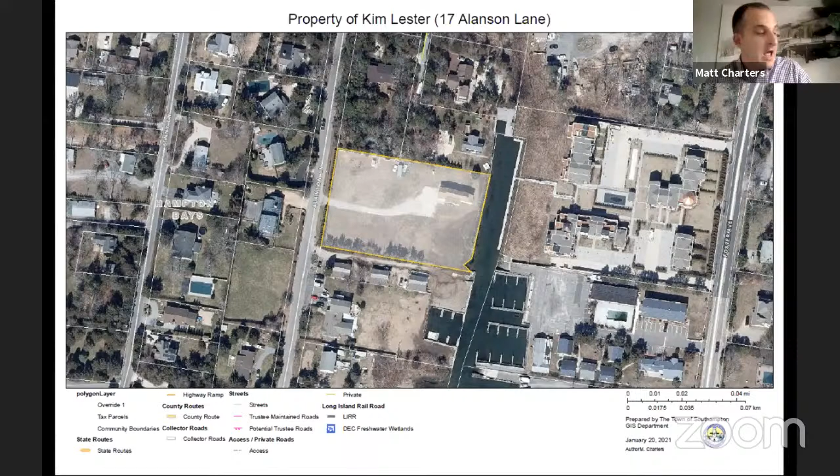Let's see if I can get this - everybody see that? Okay, so this is a work session to discuss a site plan and special exception application for dry off-season boat storage on this parcel at 17 Alanson Lane. It's about 55,000 square feet, contains a pre-existing single-family residence, it's in the RWB, New York State Archaeological Sensitive Area, in proximity to town regulated wetlands. I have a survey here that shows they want to do off-season boat storage in this area in the front. One issue we see is that there's already one use on the property in RWB - it's one use per 40,000 square feet, so it would need a variance.

And I'll turn it over to Susanna. Hi, can everyone hear me okay? Fine, yes. Okay, good. So the property is owned by Kim Lester.

He inherited the property from his grandfather in 1969. And at that time, the taxes were about $100 on the property. Now they're over $11,000 per year. So they're seeking to supplement the income for this property by storing boats in the off season.

We are here today to get some feedback and a general impression from the board, because in order to enact this plan, they would have to get a zoning variance, as Matt mentioned, and then come back to you for site plan approval and a special exception use, and wetlands review as well. So before going down that long road, we wanted to get some feedback.

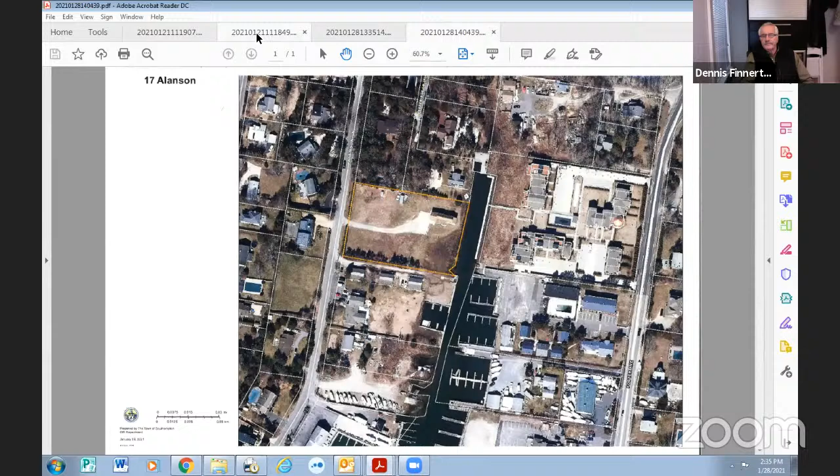One thing we want to make sure is we get input from either the fire district or the fire marshal. If you go back to the sketch, you want to make sure that you can get - they may have specific requirements of spacing of the boats to get emergency equipment in, you know, if there's an incident. So I think it would be good to get that input early.

Okay, so is this one level, Susanna? Yes, these would just be parked on trailers in the yard, just on the ground. And what is your route to get them to this dug canal? You're going to have to go through the wetlands? Oh no, there wouldn't be water access. This would just be for storage, just straight storage. Essentially a boatyard.

Matt was sent along chapter 330 of zoning, 330-126, which covers boatyard. What it says in D of 130, of 330-126: in addition, all the requirements listed for the marina shall apply to a boatyard, and they're extensive. Have you gone over those? I have not specifically.

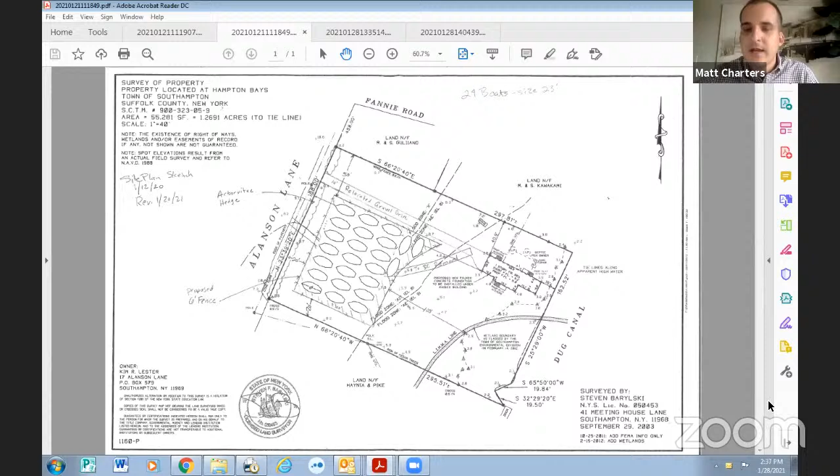Okay, well, there are 6 requirements - a marina for private profit, which applies to a boatyard. Matt, are you around? Are you there? Yeah, I can pull it up. Susanna, if you let me just exit so you can share the screen again. Okay, and I'll just pull it up so everyone's familiar with what the requirements are.

Yeah, so this would be a boatyard. All minor and major repairs to recreational boats and commercial fishing may be provided in such a repair service, not deemed incompatible with the use of adjoining properties. Outdoor storage of boats may be permitted - it just gives some, commercial fishing, dockage, warehouse, outdoor storage uses may be permitted. And then everything for marina would also apply to boatyard, I think, as you do it. It is a special exception, so these requirements would have to be met as part of the site plan. That's pretty much it.

So the major issue is the 2 uses on the property. I don't think we would be proposing to do any boat repair at the site. Yeah, and that's something the board could condition, on a case by case thing, that's what they say. This is going to only be for dry storage, boats on trailers, no repair, no washing, no detailing. We wouldn't have a fueling facility, we wouldn't have water access. This would be purely storage. They don't have interest in running a business beyond just renting the space.

Is the house rented? I believe so, yes. And where is the access? Would that be alongside the boat storage? There is - they've just moved the driveway over, actually. There is a gravel driveway that goes straight in from the road to the house. Okay, I can see that now, thank you. And that's where they would bring in the boats as well. There would be a gate in the fenced storage area to come in that way.

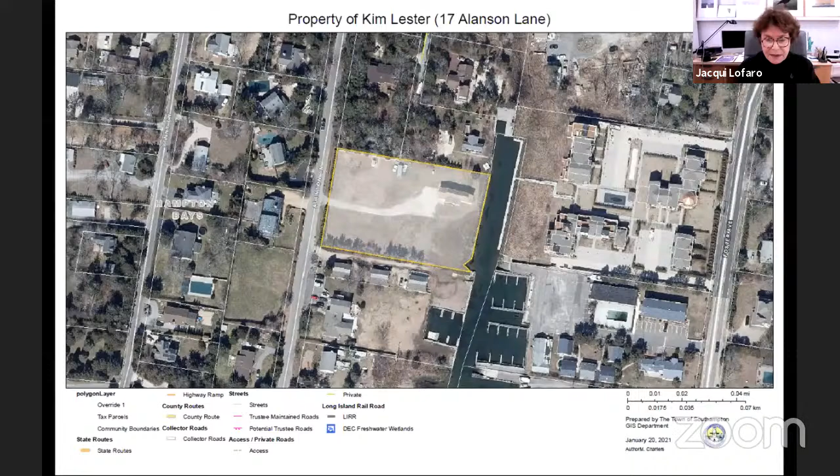And the application says that there's a pool. Can you just point out where that swimming pool is? Jacqui, I don't think there's a pool. There is no pool, no.

The house is going to be a two-story frame house with garage, right? Am I looking at the right thing? I don't think there's a garage. Oh, okay. There's an attached garage, I believe, or there was at one point to the house. But we're not proposing to do any other construction.

This is the unique situation where the house is actually the pre-existing non-conforming use and the boatyard would be a permitted use by special exception in the zone. So the major issue I can see here is whether the house can remain with this other use. But that's up for the ZBA to determine.

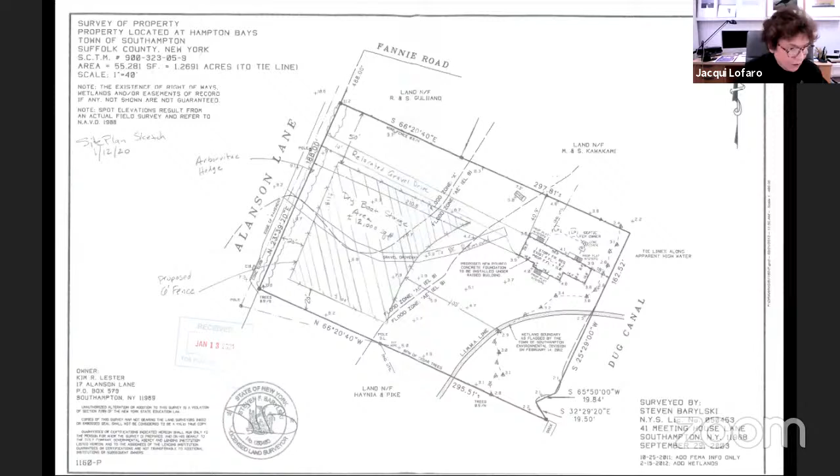I think you have some direction, Susanna, from us, unless you have any other questions. Is the board comfortable with seeing this if Susanna proceeds to the ZBA? I think there's going to be some neighborhood pushback. As a board member, I don't have any particular heartburn about it. I think it's a reasonable use of property based upon, as was explained, the current tax situation and so forth. But I agree with Jacqui that you're probably going to get some pushback from the neighbors.

Is it RWB though? It's RWB. So actually, like I said, the house is RW. What could happen is the house could no longer be there, and then a boatyard, they could submit an application, a pre-submission for the special exception for a boatyard. The town creates these zones specifically to accommodate these types of uses. I remember years ago when the area in Eastport where Trumpets was coming in, before Trumpets was built, wanted to change to a residential zone, and the town said no. They want to keep it as RWB; it's a valuable zoning designation.

Right, even though this is on a dug canal, it's not on a natural water body, it's RWB. There are many RWB parcels that are not even fronting on water.

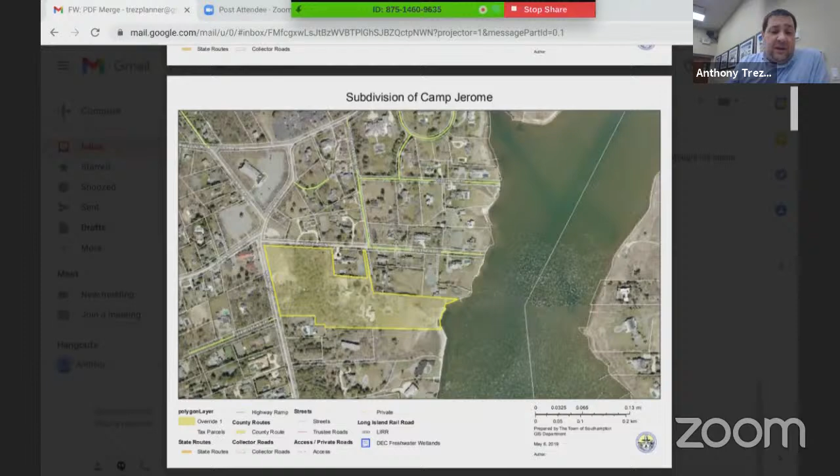I'll try again here. So anyway, this is a subdivision off of Main Street in Quogue. This is the water quality improvement high priority area, R40 zoning district. There are multiple existing structures on this property, including a main house and 2 cottages, as well as a number of accessory structures. The application, and this is actually a yield map, showing a total of 8 lots. Their preferred plan was a 4-lot reduced density plan, with 2 lots up here, 1 lot down here, and then the 4th lot containing all of the existing structures.

The application was previously deemed incomplete. The planning board raised the question about having 3 residences located on 1 lot. So this went to the Zoning Board of Appeals, and in a recent decision they approved the layout of the subdivision that would allow for the 3 residences and all the other structures to be located on this property, and then 3 vacant, new lots up here.

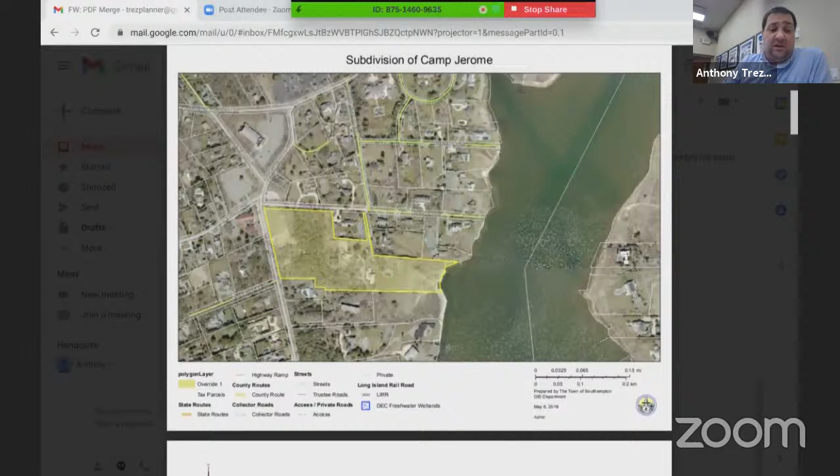The last time we discussed this, they were still pending with the ZBA. We discussed waiting for the ZBA decision. We were waiting for the yield map, which the applicant submitted. We did talk about a cluster plan, but the planning board waived that requirement for this property. So at this point, it looks like we have everything we need to deem this application complete, as a pre-application, and to schedule the hearing for February 25th.

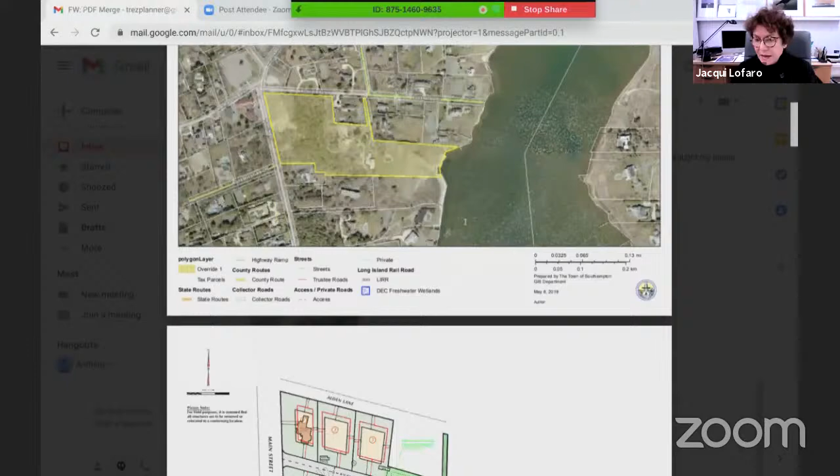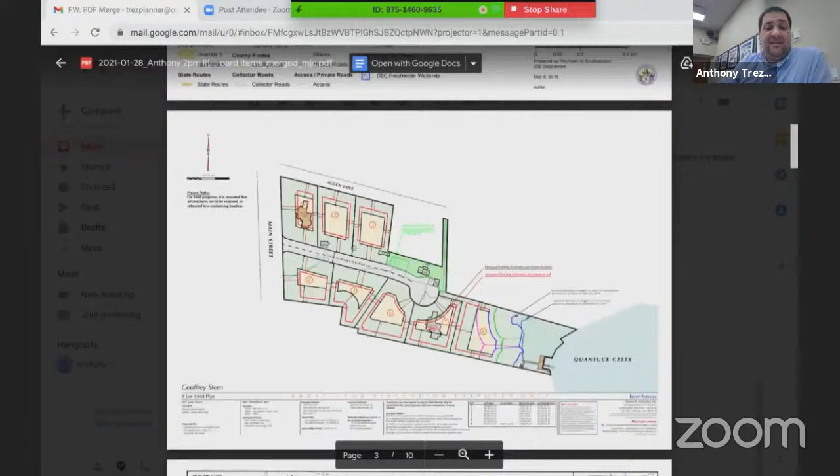Can you tell us the rationale the ZBA provided to allow for 3 residences on 1 lot? Well, I think it was ultimately that the applicant was able to demonstrate that the overall subdivision density - these 3 new lots and the 3 existing residences here - ultimately would not result in any additional density beyond what the yield would authorize. So if they were entitled to 8 single-family residences, the result of the subdivision is still only 6. That's as best as I could ascertain from the ZBA decision.

Anthony, just a clarification - in the packet we're talking about a proposed 3-lot subdivision, but I'm hearing there's a 4th lot, and I apologize, Gloria. It was an error on my part on the description. There were multiple plans submitted previously, but the preferred plan was the 4-lot plan, so the description should have been 4. That's correct. I thought maybe because those houses are there you don't count that lot. No, it's definitely a mistake, and I'll fix it, and the final agenda will be fixed.

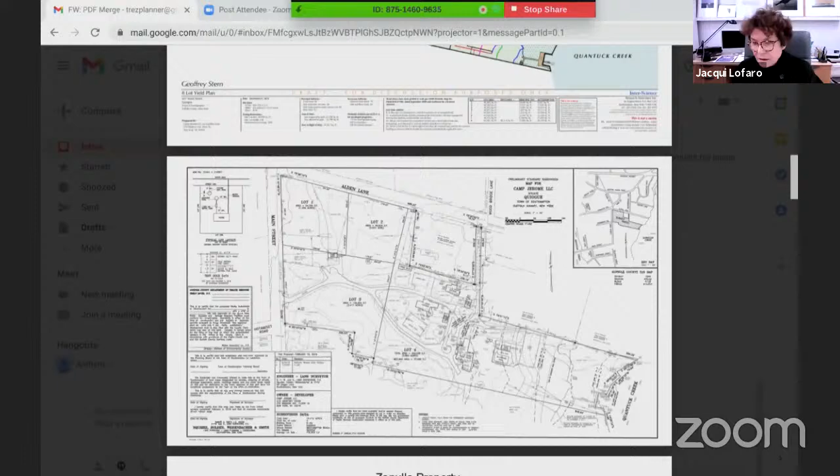So it's lot 4 that has the 3 houses? Yes. And it has sufficient setback from the Quantuck Creek? Well, they're all existing, so I believe the wetland setbacks are here. I think the swimming pool improvements don't meet the setbacks, but they're pre-existing. Okay, so it's complete and we schedule a hearing for February 25th. That's correct.

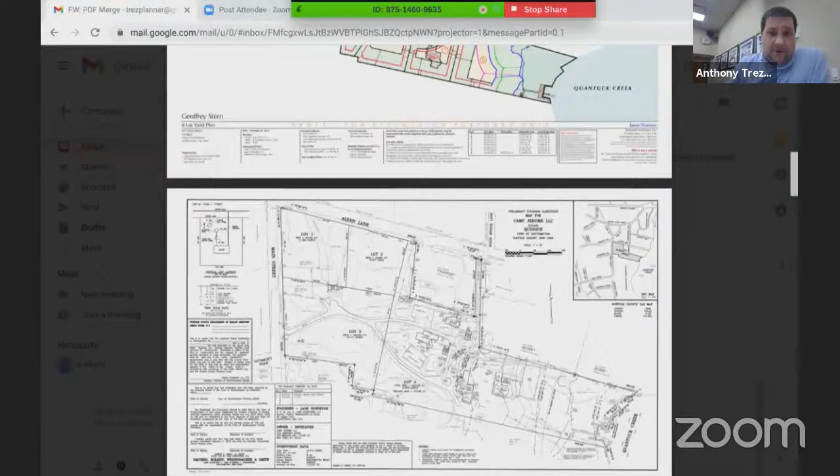The planning board should be aware that this is a family-owned property. It's always been Camp Jerome. There are 3 members in the family, and they took ownership of the property. They came to us and asked for ideas on how to deal with it. As we got into the property, they expressed interest in keeping the main lot themselves. There are 3 houses: a big house, a 1.5-story cottage, and a 1-story cottage, and the 3 families go there in the summer. If you visited this summer, you'd find kids running around playing on the basketball court and tennis court, and there's a boat slip at the waterfront. It's very pleasant.

This used to be an artist family property. Camp Jerome is named after Jerome Stern. A lot of the art was moved off, especially near the road, but much of it is still there, and the family wants to keep as much intact as possible. There also was a little pony school up front, but that's kind of petered out with COVID-19, so I haven't seen the ponies in a year.

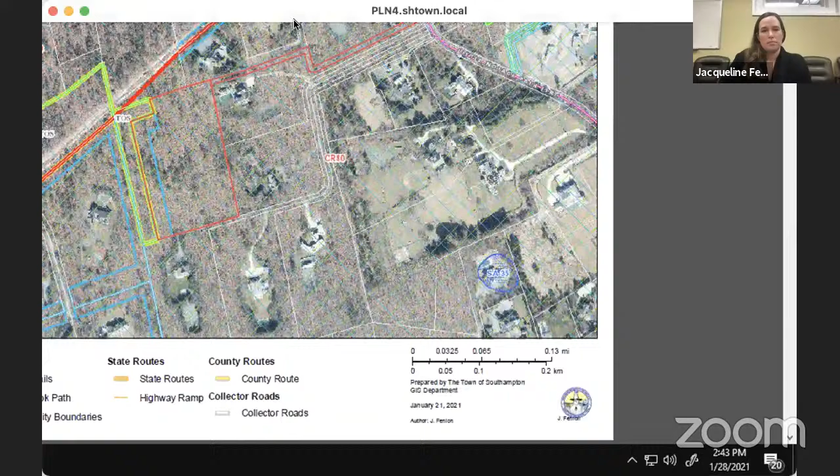So this is the overall area, on Little Noyack Path. You can see there's adjacent open space here and to the north. One reason the applicant would like to discuss this today is for completeness, but they also wanted to know whether the planning board would consider a cluster plan. I thought you would at least want to review a cluster plan, given there's a small strip of open space and the parcel is oversized. They are seeking 2 lots.

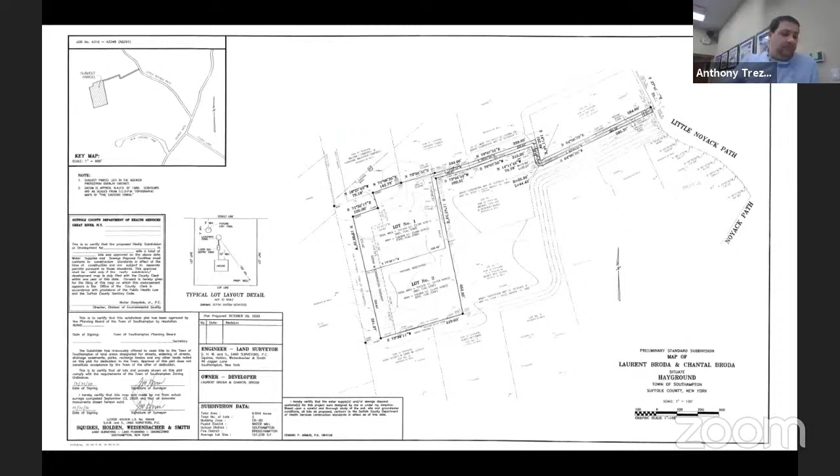On this lot there is a scenic conservation easement already established, and they're asking to serve it via the existing 25-foot flag strip, which would give each lot 12.5 feet of frontage on Little Noyack Path. I was playing phone tag with the applicant's representative, but I discussed some items missing from the subdivision map. We agreed he would give me information on the access strip, which you might notice is actually a separate described property from this one. I wanted to know how this was established, and also to get the intent and understand who imposed the scenic conservation easement here.

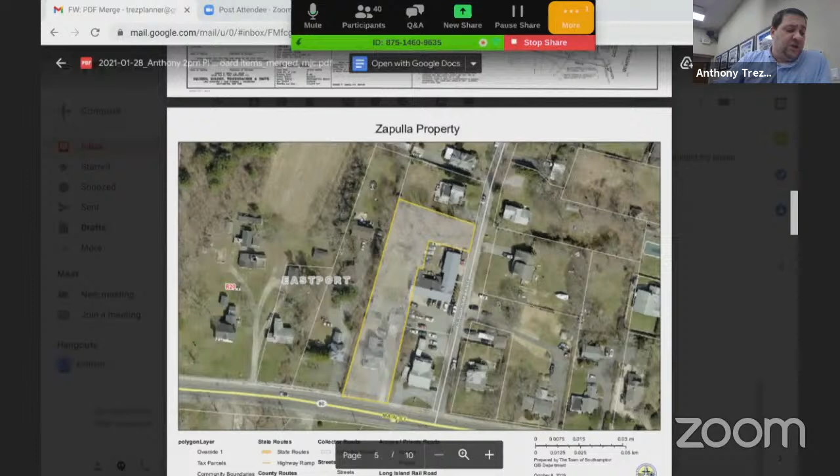Anthony, the Zapulla property extension, one year? This is a 2-lot subdivision in Eastport. It has an existing single residence in the front. They're going to be doing an affordable housing lot in the back, so they had to go to the Zoning Board of Appeals on that. The Zoning Board just had their first hearing last week on it. I attended that hearing, so they're in the process. We're a little late with the extension, but the extension would bring the pre-app report until January 9th, 2022, and this is just the first normal extension.

Okay, motion for the extension, motion by Dennis, second by Zuccarelli, all in favor. Aye. Abstention, 6 in favor.

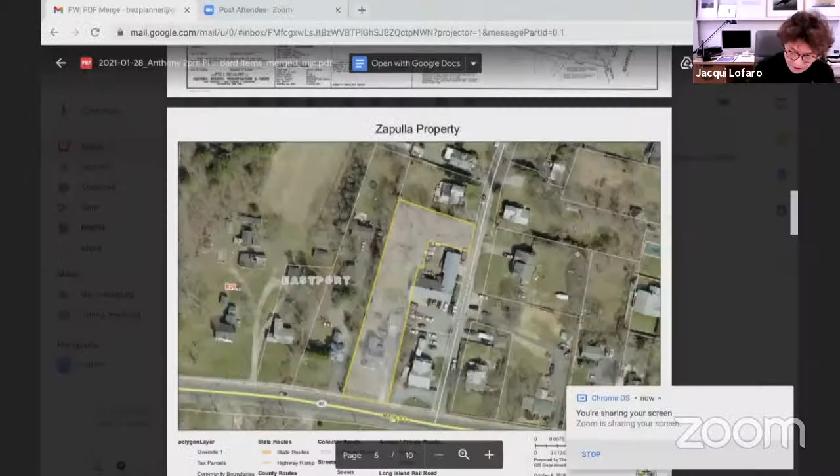The Fisher organization is off the agenda, number 7. Yeah, that's off. And Eric Donato, number 8, is another extension. Yep, so let me just get to that. Okay.

This is a Hampton Bays property, on Bay Avenue West in Hampton Bays. This is a lot in the R20 zoning district, has an existing single-family residence on the front here. There is a right-of-way that traverses the property, and they're looking to do a second lot in the back. They're also before the Zoning Board of Appeals for this application. This would bring the pre-app report, this being just the first extension, until July 19th of 2021. It's a little late, this one. I happened to notice it in the system, so I got in touch with the applicant, but it would bring it until July 19th, 2021.

Great, motion for the extension, motion by Gloria, second by Dennis, all in favor. Aye. Opposed, abstention, 6 in favor, 1 absent.

Jackie, can I just interrupt real quick for one second? Sure. Just to remind you, number 10 is off the agenda, Oakland Farms. Got it, right? And I just wanted to ask if I could quickly walk on, it'll take 2 minutes.

At the last meeting, we did a covenant amendment for 4 Blue Jay Way, Wildlife Associates, Section 1, Lot 54. It was a covenant amendment to allow the clearing to go from 35% under the covenants to 50% under the code. Robin, yeah, I would go to recuse myself immediately from this, so I'm going to turn off my video. Okay, mute myself. Okay, but we didn't have 5 votes last time, we only had 4, and the covenant amendment requires majority plus 1.

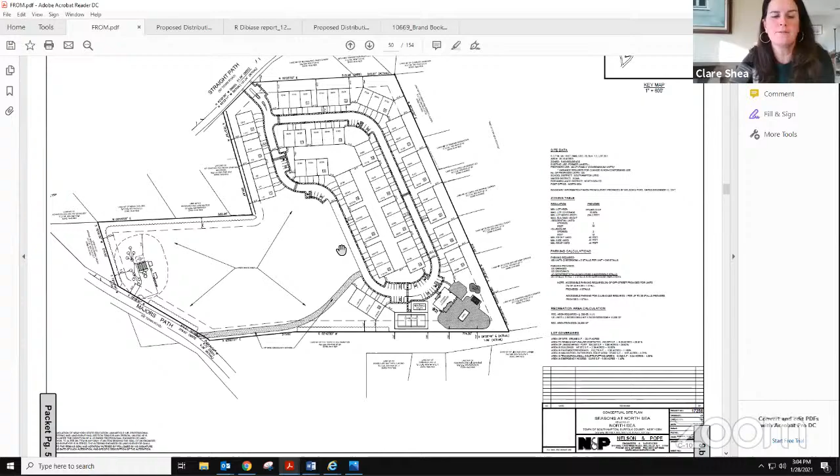And here's the plan that's proposed. They have changed this, so this was supposed to be an emergency access, but I believe that is going to be their primary access now onto Major's Path. There's the architecture, the application. It's sideways, I know, I'm gonna just get to the point and flip it back.

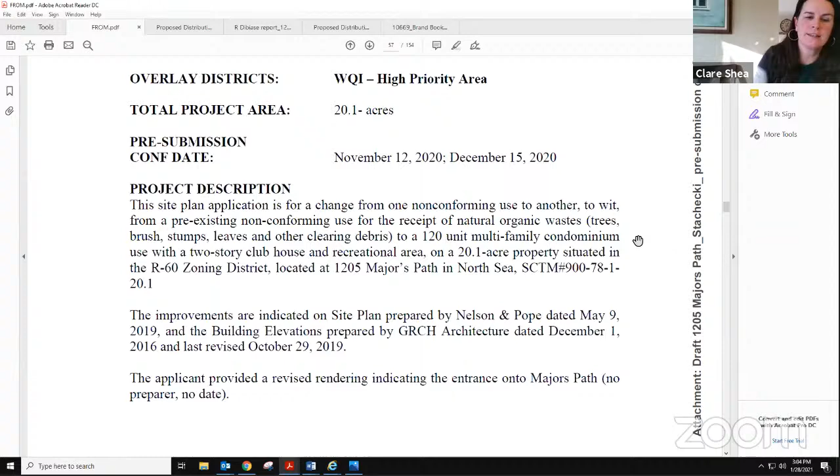This site plan application is for change of one non-conforming use to another, from an existing non-conforming use for the receipt of natural organic waste, trees, brush, stumps, leaves, and other clearing debris, to a 120-unit multifamily condominium with a 2-story clubhouse and recreation area on a 20.1 acre property situated in the R60 zoning district at 1205 Majors Path in North Sea. This describes the plans, and the applicant provided a revised rendering indicating the entrance onto Majors Path.

There's the references to the pre-submission conference dates, and the attachment is the public comments. Prior to site plan, SEQRA needs to be completed, a ZBA decision granting variance to change from one non-conforming use to another, of course a full application. So the project is a Type 1 action. Planning board as the lead agency will be required to make a SEQRA determination prior to deeming the site plan application complete.

I left this as is, to add additional information here, but maybe after we can go through the part 2, you could identify some of the issues you'd want to spell out here. I'm not quite sure if you want me to add anything right now. Well, let's go through the report, Clare.

And then the uses - attached is a copy of the CO issued by the Town of Southampton Building Department for the pre-existing non-conforming use for the receipt of natural organic wastes. This use was the subject of a ZBA matter, and the ZBA upheld the CO on June 18th, 2020. I also have that attached. The applicant stated that composting operates on site as an existing use. This is not supported by the ZBA decision - the ZBA is silent on processing. The planning board has requested a copy of any DEC permits issued for composting. Nothing has been received to date.

On the record, the applicant and the public have noted the site was a former dump site, the old North Sea landfill. Some of the history of the dump, which has been determined to be abandoned, is outlined in the ZBA June 18th, 2020 decision. No information has been submitted to date about the nature of the supposed contamination and the limits of said dump. Any residential development shall have an affordable housing component which complies with state and town requirements. No information has been submitted as to the as-of-right development under R60 zoning - cluster and yield and cluster plans with affordable components should be provided. I'll add that - should be provided, yeah.

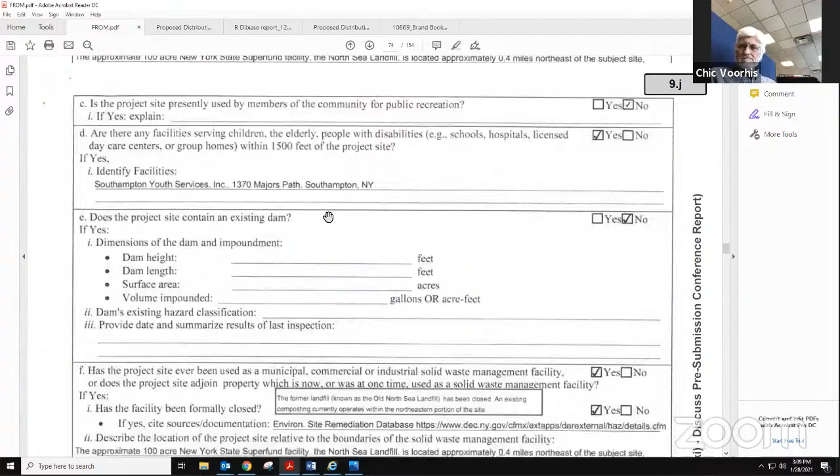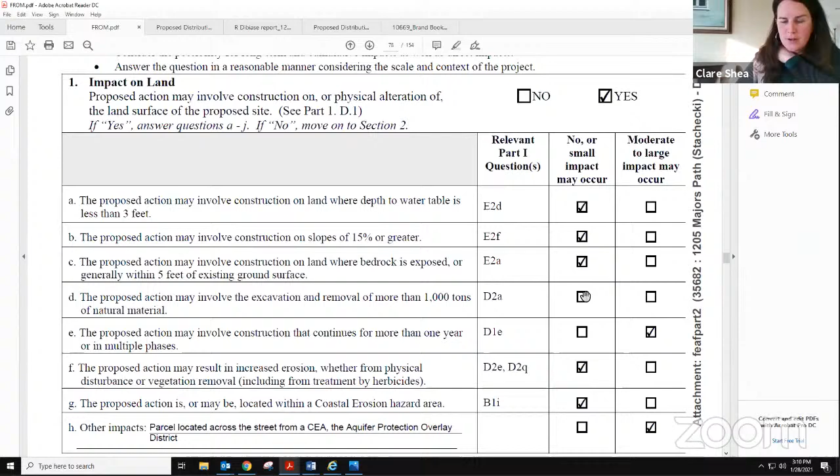Sorry, that's backwards. So this is the applicant's part 1 that was submitted, and this is part 2. As I just checked it, I didn't put any details in this, but this impact on lands is small to moderate. The action is more than 1 year. The parcel is also located across from a CEA. The Aquifer Protection Overlay District border is Major's Path, just so you know.

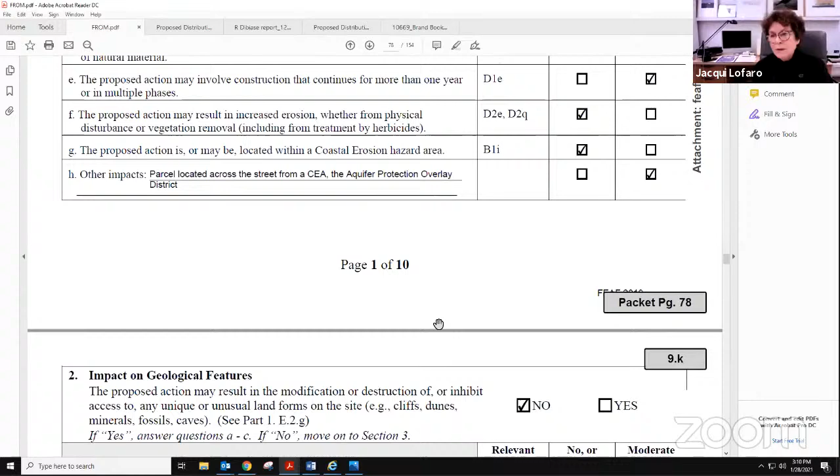Do we have to include anything in here about a prior designation as a Superfund site? Oh, I think there's definitely some designation coming up with that. So where would you put that, Clare? Yeah, I can put that in impact on land. Now its designation, not that it's a Superfund site, it's a potentially contaminated site, right, that we don't have the information for. But are you saying the Superfund site of the dump across the street? No, I'm talking about this parcel. Do you want me to say anything about the dump across the street too, or no?

Well, on this particular breakdown, I think we need to focus on the parcel itself. Is there any evidence that the parcel across the street is having any effect on this parcel? That's a good question, and this document is for this question. So I would encourage adding the parcel across the street and the issues, until we know for sure there is no impact from that parcel to this one. We do know that drinking wells in the entire area were contaminated by the dump, which is why there's county water there now.

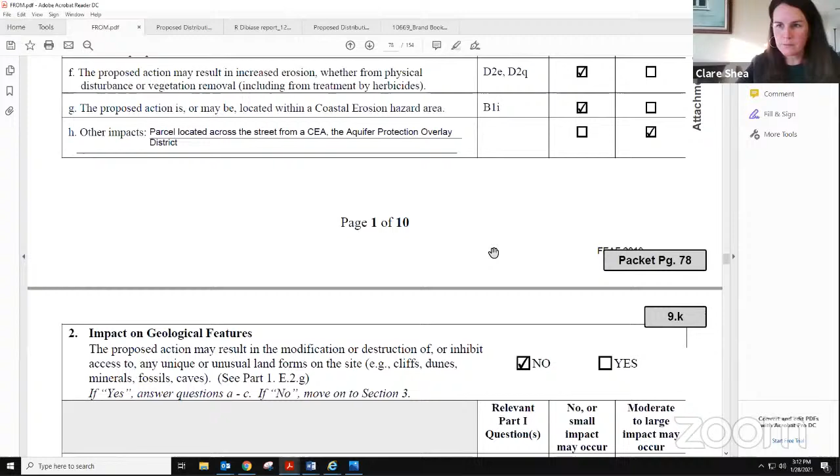So you're going to add that to the language in H, Clare? Does that alter any of your small to moderate to large impacts? Yeah, that's what makes this a large impact. I agree, and we'll put some language to that effect in there. So we're going to note the parcel across the street and the issues. Thank you, yeah, there may be a place for that later too, so there might be some crossover here, but we'll come to that. Duplication is okay, probably under groundwater. So the impact on geologic features, no. Surface waters.

I'm going to give some thought to this. I'm not quite sure if the board has any thoughts, so I'm just going to guess. There were a couple of comments related to the harbor, so I'm going to think about this section if you have any comments for that.

I know the pollution plume from the dump had been determined to be heading toward North Sea Harbor, down gradient. In fact, the monitoring wells for that facility are all placed in the northwestern proximity, so unless the hydrology has changed significantly, one has to assume that this property is in that same flow region. Yeah, right. So I'm going to click this and put some more language in here.

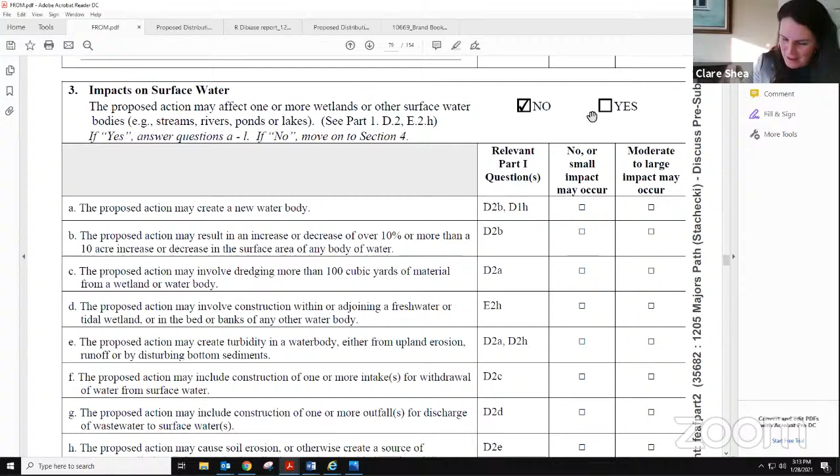Oh, or no, I can't click it. Sorry, it's not an active thing. I'm going to check it and fix that. Here's a pen for you, Clare. I know, I'll get to it, I promise.

And also the remediation of this site when it was kept in debris. I believe we have no further determination about that remediation. We asked for it, we asked for DEC updates. Right, so I think we need to include that here.

Clare, is there any place where the idea that this is such an intense use, the ability for the electric grid to support that intense use, where might that be? Energy coming up. Yeah, thank you, definitely, that's a good point.

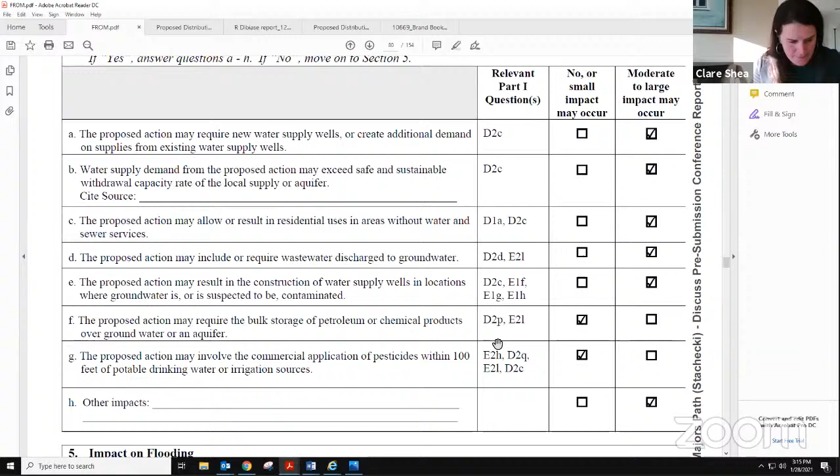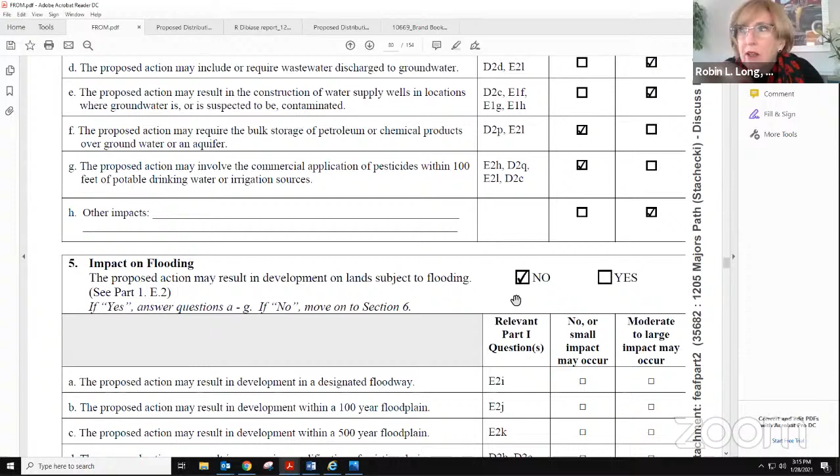There were some comments on services. Okay, so I'm going to put the information on groundwater related to the landfill on site. Impact on anything, excuse me. So it's the landfill on site, and also aren't we going to look into whether the landfill across the street has any movement towards the water sources from there? I agree, we should have some language to that effect in there. Thank you.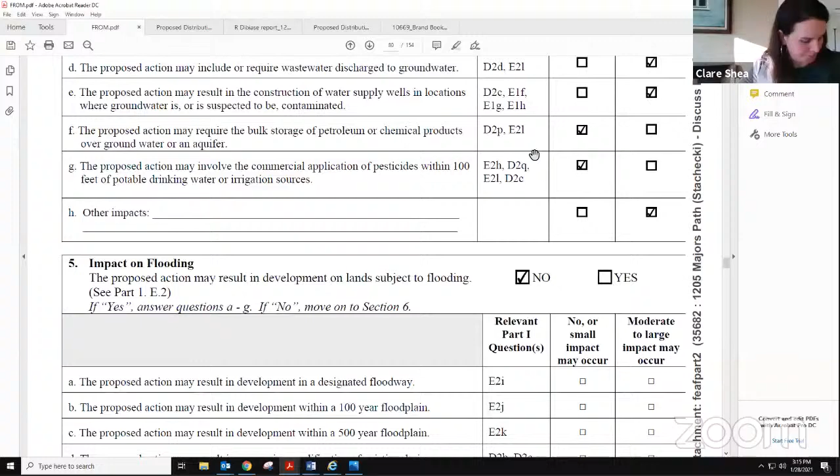Okay. And then impact on flooding — I don't have anything identified on that issue. Impacts on air, I'd say small to moderate. I start to think that air quality might be an issue.

Traffic, traffic, yeah, so that's up to you. What do you think this is — small to moderate, or large? Well, again, because of the intense amount of property that's going to be overused, it's got to be large. You know, instead of 6 houses with maybe a dozen cars going out, now you have 120 condos with a minimum of 240 cars. That's an exponential increase.

I know there are Suffolk County health reports where people think the air in the east end of Long Island is so pure. In fact, it isn't — it's horrible, because of traffic, with the combustible engines on cars. Not enough of us have electric cars.

Okay, so are we changing that to significant, or what is that? I'm changing that to be large. Yeah, and I'll put some language into that. Again, we'll have an opportunity next week, and I'll send it to you ahead of time. So give some thought to it.

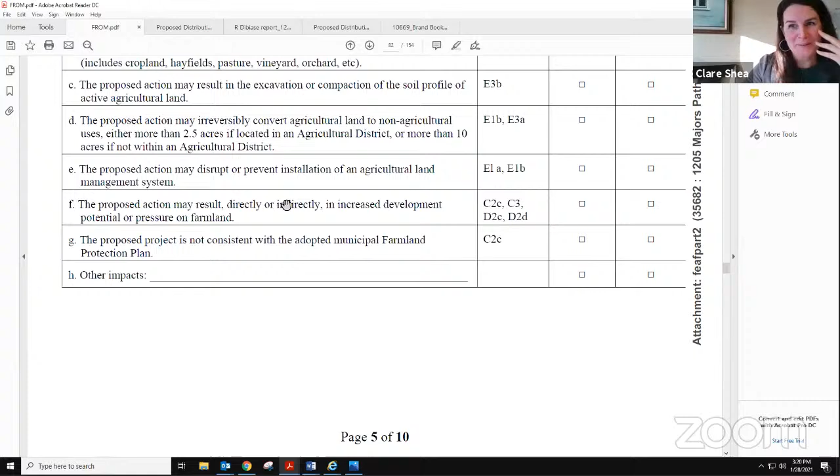Impact on agricultural—I didn't identify anything. This is supposed to be a tree farm, so I don't know, but it's not an ag district.

Impact on historic aesthetic resources. I think there's a large impact, not the character of the zoning. Which categories do you have large? This is aesthetics, so I would check the last one in terms of character, and that would go back down to community character. And that falls within this aesthetic category? Yes. Okay.

This does not appear to be in an archaeological or historic site, so I did not check this. It's a historic dump from the 1950s. I bet there's interesting things in there, that's for sure. I don't know, is that one of the thresholds? Now I'm being a little silly.

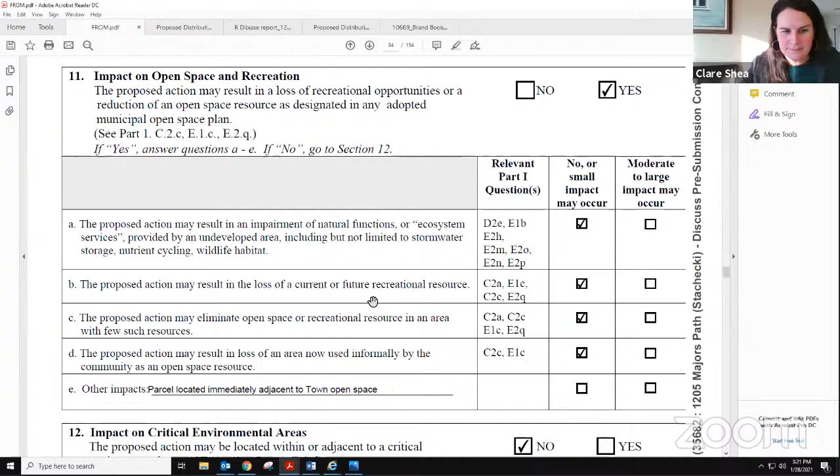Gotcha. So the next section is open space. It is immediately adjacent to open space to the, I guess, northeast, maybe. I don't know if you want to just check this to be small to moderate. Small to moderate, I think, yeah.

So it is not in a critical environmental area that I've identified to date. As I said, the aquifer protection is on the other side of the road, so this is the border.

Impact on transportation—this is a large one. I'll put some language to that effect in here with the numbers and things.

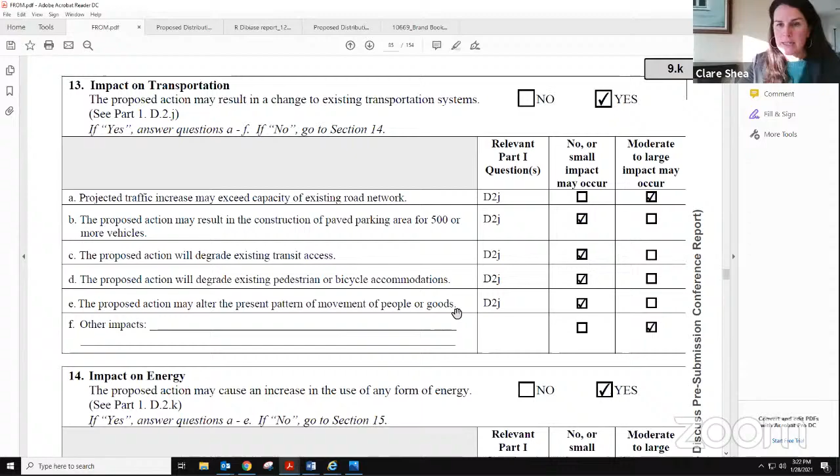Very much. And here is your impact on energy. I think this is a valid one. I've checked moderate to large. I did a quick calculation of this, and it's well over 100,000 square feet of building area.

And then noise, odor, and light. This one I did check, obviously for construction purposes. Hopefully no more odors with this use. This is a potential—obviously we have a very strong town code, so this could be small to moderate if it's controlled through the site plan. But I think it's the number of lighting in one area that it would result even if the density—yeah, so that's why I've done that. If you want me to change it, I can.

And then impacts on human health. Is the site of the proposed action currently undergoing remediation? Maybe not currently, but should—we just don't have that information yet. And so I've checked a couple with the solid waste modification facility, unearthing solid and hazardous waste. We just don't have a lot of this information yet, so I'll try to answer these questions. I've just said former dump, obviously, but I'll put some more language in there related to that.

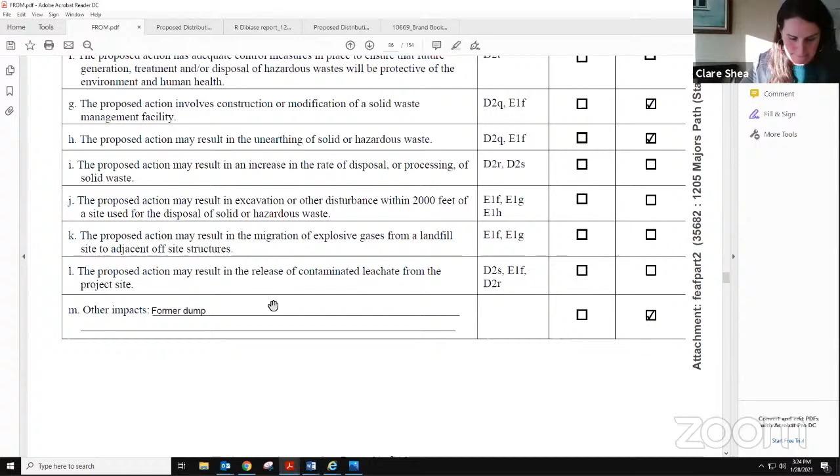Anything you want me to add? Well, you'll just flesh those out, right? Yes, this is going to have a part 3, which is a narrative. Language, yes, we'll go through it. And the consistency with the community plans—yes, large, all of them. And then consistency with community character, correct. Again, a lot of this is that you don't have all the information, this is a concept, and that's what SEQRA helps you get.

Any other questions? No, that looks pretty complete. Thanks for going it over. Do you want the applicant to speak, or does the applicant want to speak with you? Here, Chick, David, would you like to say anything, or have you heard the report?

We've heard it. Hi, everybody, Chick Voorhees of Nelson Pope and Voorhees on behalf of the applicant. We're here to listen. We did get a copy of the draft pre-submission conference report before the meeting, and everything looked to be in order. Certainly identifying the potential impacts is critical to this process, so we're taking notes—it's almost in effect like scoping.

These are the things that are up to the planning board to determine what impacts are potentially significant or small to moderate. I have nothing to add. I think Clare did a great job, and we understand the concerns.

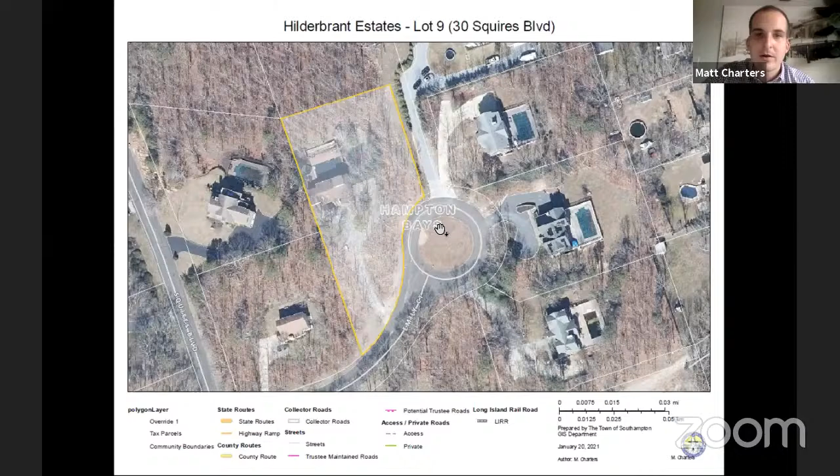Number 11, Matthew, Hilderbrant Estates covenant amendment. This is a covenant amendment to bring the clearing restrictions into conformance with the town code on the property, located at 30 Squires Boulevard in Hampton Bays. They were limited by covenant to 12,000 square feet; the amendment allowed them to go to 50%. We got a survey with this application that shows they're in compliance, and the aerial you're looking at is actually pretty new, from 2020, so it still looks good. Kathleen's reviewed the language and found it acceptable. That's pretty much all I have, so if the board's okay, we can move it.

Okay, any discussion? If not, a motion? Motion on the covenant by Gloria, second by Dennis. All in favor? Okay, six in favor, so we have a super majority, and one absent. Thank you.

Jackie Rothman, Dynasty. Yes, can you please let Daphne Vaughn in, and I believe also the owners of the property, the Rothmans, would be on the Zoom call. Okay, this is a super lengthy report, so you might want to not read every word of it, please, but just go through it. Charles, are you seeing Daphne and the Rothmans? Yes. Okay, thank you.

Okay, so if you'll recall, this is the subdivision. They're seeking a 2-lot subdivision. This is the same property where they were seeking the covenant amendment for no further subdivision of Lot 1, which this is. The other lots in the subdivision go further to the east. This is an 8.05 acre parcel with a yield of 2 lots for the R80 zoning district.

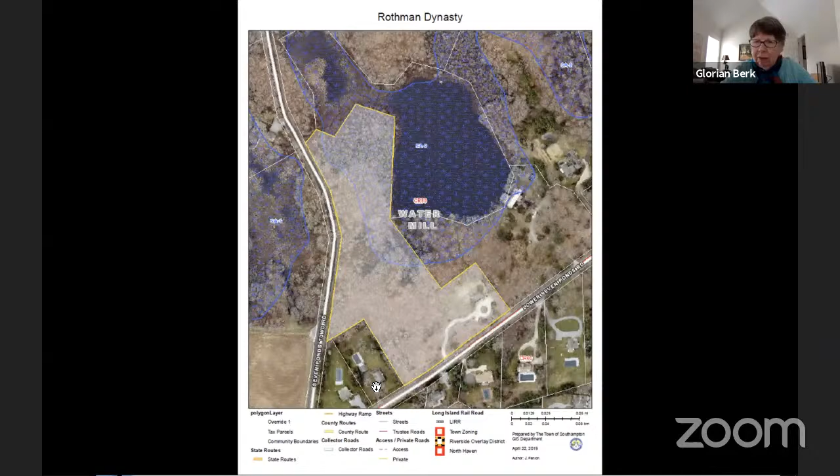It doesn't matter which way they go, they're going to be in a queuing situation, in my opinion. I've seen it much worse here. I haven't ever really been queued back to here before, but that's my personal experience. It's all on Lower Seven. I live probably closest to anyone, and it's all on Lower Seven. Oh, that's my back road to Water Mill. Yeah, I've definitely been queued on this entire road, all the way back to this, what is that road? Head of Pond.

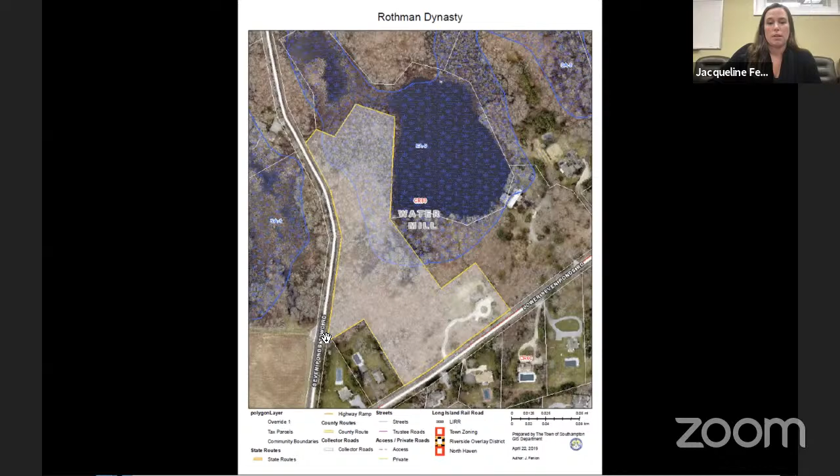So there has to be some discussion with the highway department. Jackie, in the recent comments, I might be interpreting this wrong, but I felt like they were changing their tune. I felt like they were now amenable to one driveway as long as it was built in accordance with their standards, with a bond held for the maintenance of that for an initial year.

Would you like me to read it, just because I know it's probably small on your screens? The only question I have is I'm getting confused because it started with an issue about drainage, then we've been talking about cars and traffic queuing up, and now they're saying... so let me connect this. Is it their attitude because of the drainage, but how is that affecting the cars queuing up? Because Robin, they wanted a driveway to get out of their property. No, because of the queuing up. Yes, so there's a nexus.

The traffic isn't changing because we've changed the drainage. Right, so Robin, what it is, it's queued here. They're asking essentially for what I've been calling an escape driveway, for lack of a better term, but the escape route would be here. So when there's heavy traffic, this lot would be able to navigate to Seven Ponds Towd Road and get to the intersection without having to wait at this driveway. Jackie, is there a way of connecting, giving access to the second lot?

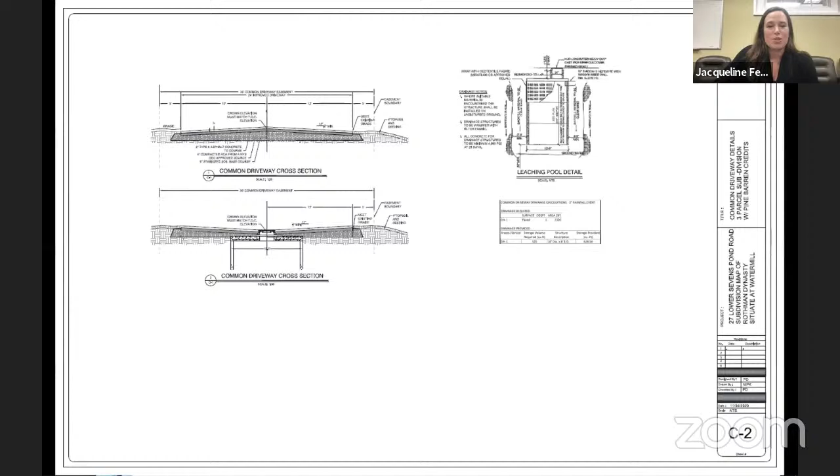But actually this one kind of shows it. It's grayed out, so it's not highlighted, but this would be the common driveway. We're asking them to get rid of this curb cut and have a common driveway right in the middle here, so it'd still only be one driveway curb cut. And they are showing this - I believe it's intended to be a family compound, but I don't want to speak for the owners and their intent. But they are showing that this would give access to here and then out to here.

Now, this is the area of concern, which is in the town highway right of way. Based upon my preliminary discussions with highway, they were now okay with it. They didn't want anything to mess us up, but they basically said if it could be built properly to their satisfaction, with a maintenance bond agreement for at least one year, they were now essentially willing to see that, as long as it was designed appropriately.

So this is in the highway right of way. Is that speculation or do we have it in writing? I believe in their most recent comments, that's how I interpret it, but I can confirm with them. And I was asking for compliance with them as well.

Let me go back to their newest memo from December, and I'll read this into the record. Upon review of the reference project, we have some concerns as it pertains to the Town of Southampton Highway Department's right of way. The proposed driveway road opening that has egress onto Seven Ponds Towd Road impacts the Southampton Highway Department drainage swale. A previous meeting between the Highway Department and representatives of the owner was held on site. The discussion of the impact of the drainage swale and the Highway Department's determination was agreed upon.

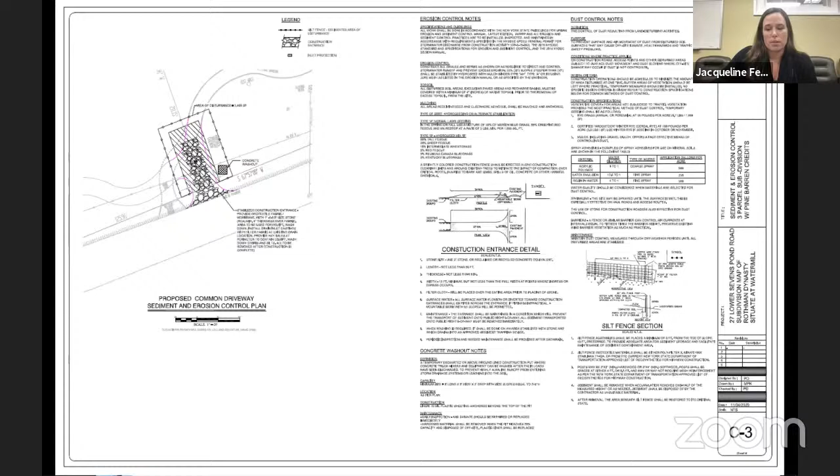When I was on site, it did look doable. I'm sorry, there was an error converting it to a PDF, the plans that I had, but it did show that we do have full engineered plans, which we can work with the highway department on.

I just have to say, I think this is so much ado about nothing, because both roads are horrible and they back up very far. I don't really understand why they feel the need for it, because Seven Ponds Towd Road, I will not use that road at 4 o'clock because I'll be backed up to Head of Ponds.

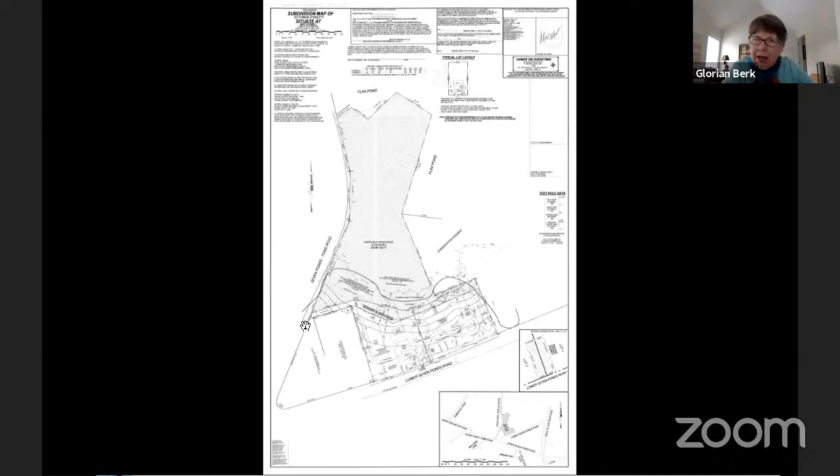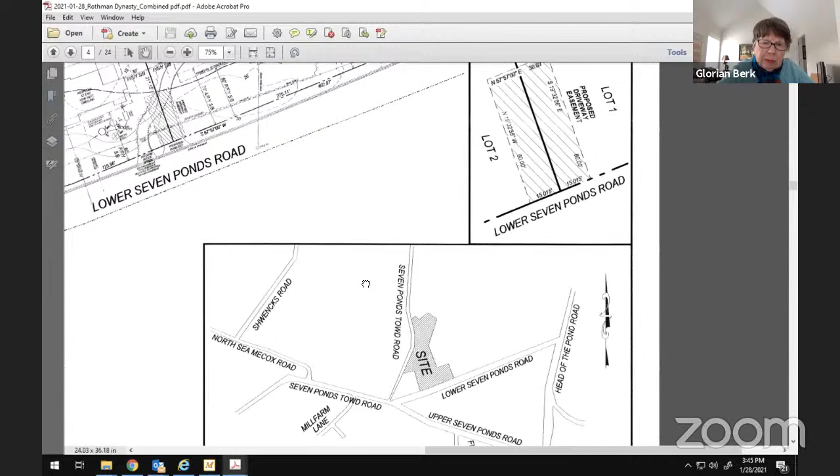Yeah, actually there's a key map, maybe we can look, sorry, my screen is taking forever. This is the key map. So this is Head of Pond that heads up with Watermill Towd Road. This is Lower Seven. That's Seven Ponds Towd, which meets up with the Great Hill Road intersection. Lower Sevens is the one that backs up. This is the one I've been stuck from here, queued all the way to there. I have not generally been queued. I am, it is, Seven Ponds Town is jammed at 4 o'clock, it's the trade parade going home.

There's just too damn many Seven Ponds roads.

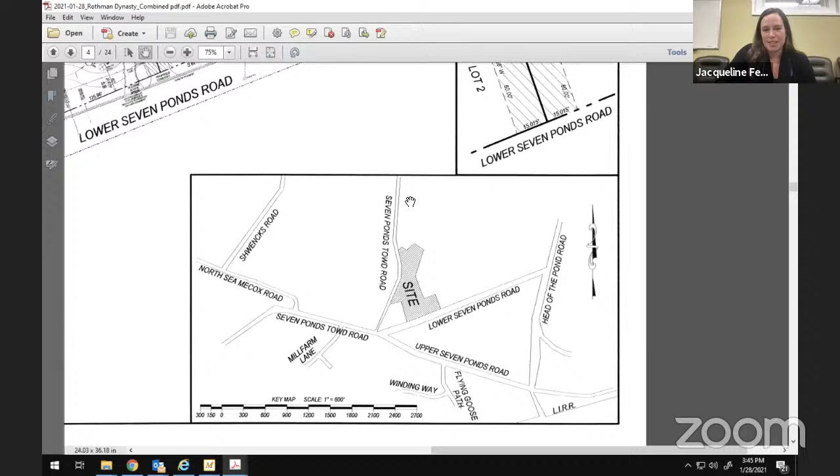It is confusing, change those names. You've got Seven Ponds Upper, Lower, Seven Ponds Town because it meets up with Watermill Town, and then you've got Head of Pond. So there's lots of ponds. I drive these almost daily and I still confuse which one is which. After 3 days of heavy rain, it's 8 ponds, all flooded.

Good one, Dennis. Sorry for the distraction, but now I'm in agreement. I just wanted to make sure you've read the town highway, you've read the engineer.

Any other reports? This is from the Conservation Board with their referral comments. They are saying that this is part of Seven Ponds. This is Flax Pond, it's in the town high priority. There's another pond there. And that this needs a 239B to go over the wetland conditions at the final application stage.

They stated that the southern portion of the parcel located along Seven Ponds Towd Road contains a swale which periodically has runoff - that's the swale we were talking about. There are 2 alternatives based upon the review of the maps. The conservation board prefers the preliminary map dated March 9, 2016, which protects the majority of the required wetlands as open space. That is important for our discussion further on.

The map needs to be revised to ensure that all of the proposed parcels lie within the 75 feet easterly portion of the wetland boundary and are protected as open space. So there are some very small portions of a radius which haven't been caught into a buffer, and I can show you that when we discuss it more.

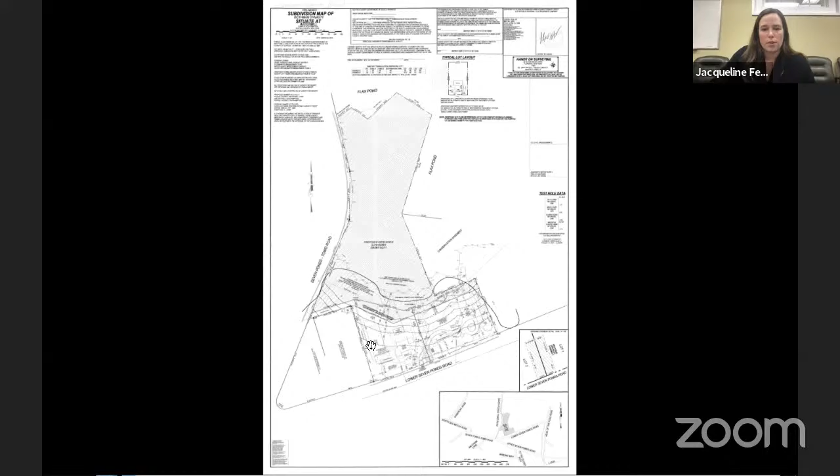So we can discuss that further. Let me get through the majority of the rest of the referral comments, and then we can have a thorough discussion on the difference between the 2 cluster plan alternatives.

So this is their existing fence need to be removed, and the updated test hole. Environmental DEC stated in their 2019 comments - we did not receive anything in 2020 - that it is located in the vicinity of New York State regulated freshwater wetlands, but the subject subdivision is not a regulated activity.

The Trails Advisory Board also weighed in. I'll just read their most recent comments. The Trails Advisory Board would like to update our comments from 2019. We commend the Planning Board and the applicant for proposed open space between Seven Ponds Towd Road and Flax Pond, as it will protect some of this beautiful undeveloped piece of land. We still believe a trail through the proposed open space for the north half of this property will create pedestrian access to the previously inaccessible Flax Pond and also highlight the area's abundant wetlands and woodland features.

A quorum of our board attended the January Zoom meeting and were shown two plans, and prefer the plan which has slightly larger open space area and does not include the non-disturbance covenanted buffer. If for some reason this plan is not pursued, the plan with the buffer is certainly satisfactory to us. We did not get any comments from the Watermill CAC or the health department to date.

So I just noted some planning issues, which are: significant freshwater wetlands, traffic queuing along Lower Seven Ponds Road, existing stormwater swale along frontage of Seven Ponds Towd Road, existing culvert directing stormwater flow to low-lying area, open space configuration versus buffers for upland wetland preservation, and New York State DEC listing possible endangered animals. So we will have to look at that more closely.

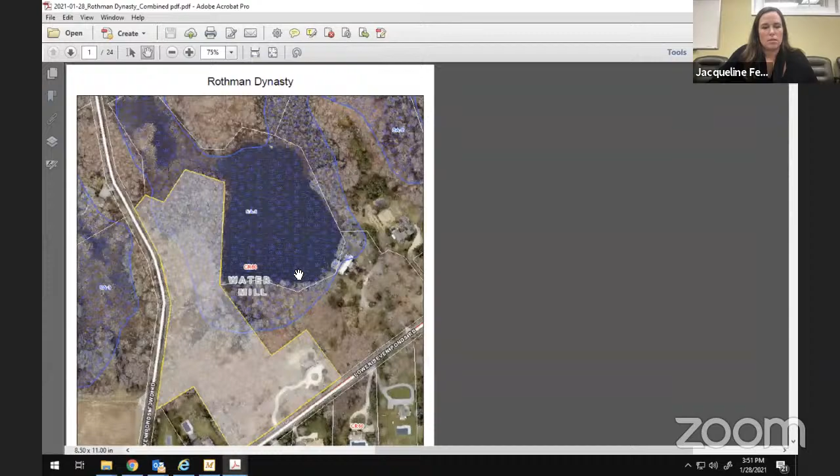Oh, so that was the yield plan. And then this is the cluster plan.

So if you'll see, this is where you get that 83 feet to the proposed driveway. And this solid line here is the open space line. So with that, you are having the majority of the wetland setbacks, which would be 75 feet for this parcel since there's an existing dwelling. You'll note that the dwelling is set kind of far back in the northeast corner of this lot. This is the existing residence, and then the 75-foot buffer you'll see is right here. So this arc is a 75-foot buffer. You'll see here that this is just missing a little bit of buffer hatching to establish that.

And then this lot would be entitled under 325 to a 100-foot setback, so they are showing a 100-foot setback here. You'll see that this radius just dips a little bit into the residential lot, but still showing the common driveway. So this plan would propose 5.656 acres of open space, and again the majority is in the open space for wetland buffer compliance.

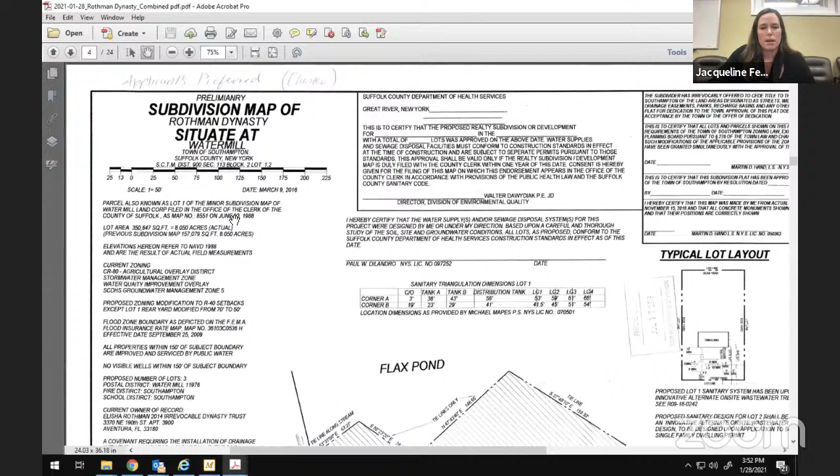And then the applicant's preferred plan here shows 5.278 acres, which equates to about a 16,000 square foot difference between the cluster plan with majority open space wetlands, and this one has buffers, which provides for the property to be slightly bigger. So this one would be around 57,000 square feet, and this one would be around 53,000 square feet. It shows that the open space line would be here, still along the north, and that the buffers are proposed in the north here.

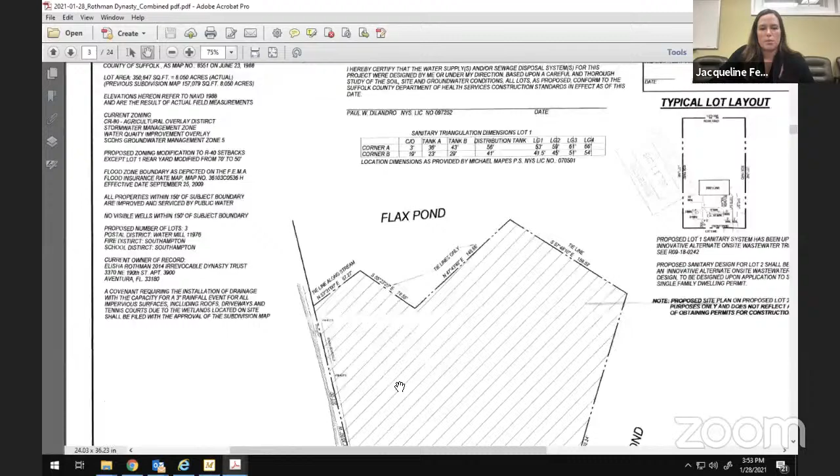And what was the Conservation Board's preference? The Conservation Board's preference was the open space plan, this one, which had the majority of the wetlands in the open space parcel. But we still could basically buffer those little slivers. That makes sense - that makes more sense than the applicant's preferred plan.

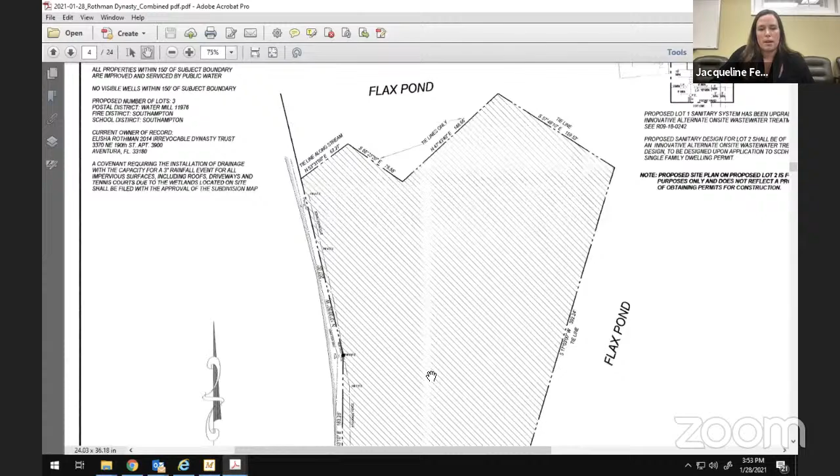So I'll just go back. This is the applicant's preferred plan again, just so you can compare them. In relation to 325, they are showing the buffering. We can address those radius right here. This is the wetlands line here, so you'll see that this has a buffer portion, and then this.

I did want to also note to the planning board, there is some existing clearing in here, which is the revegetation and restoration that we were talking about, so that would be in the buffer here as well. But you can see that this gives just a little bit larger area along the north. Right, but it's less protection in terms of - yeah, I just wanted to show you the differences. Less protection, yeah.

So I'll let Daphne speak to the differences in the plans and the applicant's preference for this plan. Daphne, I'll keep this one up if that's fine. Sure, that would be great. Thank you, Jackie. You're welcome.

Daphne Vaughn, Surfside Environmental Planning. I'm also here with Eli Rothman. He should be let in if possible. Okay, he's the owner of the property. Oh yeah, sorry, I thought they were already let in. No, he's definitely not on yet. He's waiting, coming. Thank you, Charles.

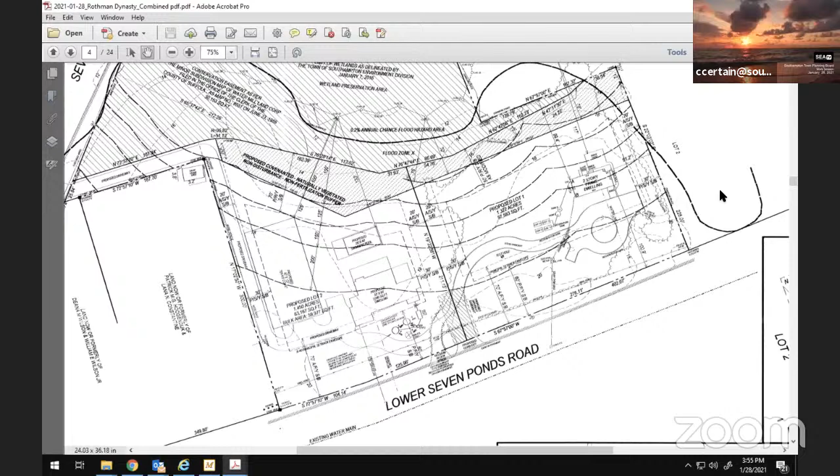Okay. So, he's being let in, right? Because I don't see him on my screen. He's here. Okay, good.

So just to address a couple of the items that have been brought up with regard to the second driveway onto Seven Ponds Towd Road - I met with Jackie at the site back in June. She and I discussed some of the options for proceeding with the driveway. I then set up a meeting later on in the summer with two members of the highway department, and they were supportive of allowing the driveway as long as we met their conditions, which Jackie specified in their comments. Their concern is they just want to make sure that the stormwater will traverse the existing swale effectively. They said that basically they would maintain the structure, keep it clean as part of their normal work for the swale, and ultimately said as long as we have something engineered properly, they would fully support it.

With regard to both of these plans, the protected wetland area is not changed between them. It's the same amount of buffer to the wetland. It's a matter of some of it being within the open space versus some of it being covenanted buffers within the parcel metes and bounds.

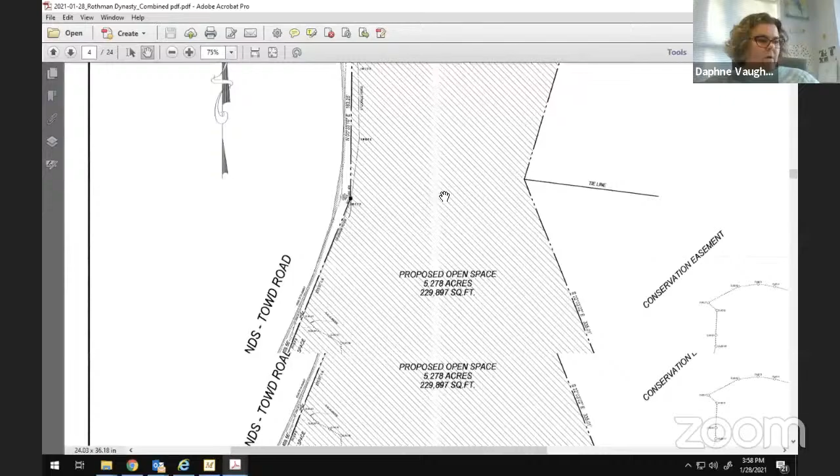So as Jackie indicated, there's 2 open space cluster plans. My client prefers to have this plan that's before you right here with some of the buffers located on the properties. This open space plan preserves basically 65.56% of the property as town dedicated open space versus the other plan, which is 70%. So it's less than 5%, 4.5% difference in the overall property size. It's a 16,493 square foot difference that would be adjusted between the 2 lots, just as part of the metes and bounds of those parcels.

One thing that could be done to ensure the town that those would not be disturbed would be the potential installation of a split rail fence at the edge, since on lot 2 -- Jackie, maybe you can show them the edge of natural vegetation right now. Yeah, so pretty much all of lot 2 is naturally vegetated. So if we were to do something to demarcate the edge of that buffer to ensure the town that that would not be cleared, most specifically on that lot, because that would be the most important one.

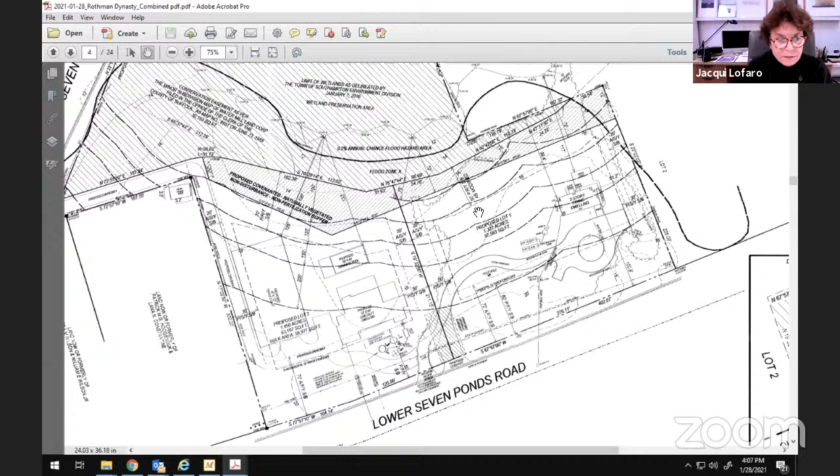On the other map, it encompasses the entire residence within that 50 feet, because when you take that 50 feet off the edge of the buffer - which is essentially the lot line on the other map - it traverses a portion of the existing residence. So whichever way it goes, we would like to seek that 50-foot rear yard setback just on lot 1, to give them some zoning flexibility without needing to go to the zoning board in the future. All of the other setback requirements for accessory and principal structures are within the R40 zoning setback, so they're compliant. And they would not in any way intrude on this covenanted, naturally vegetated non-disturbance buffer?

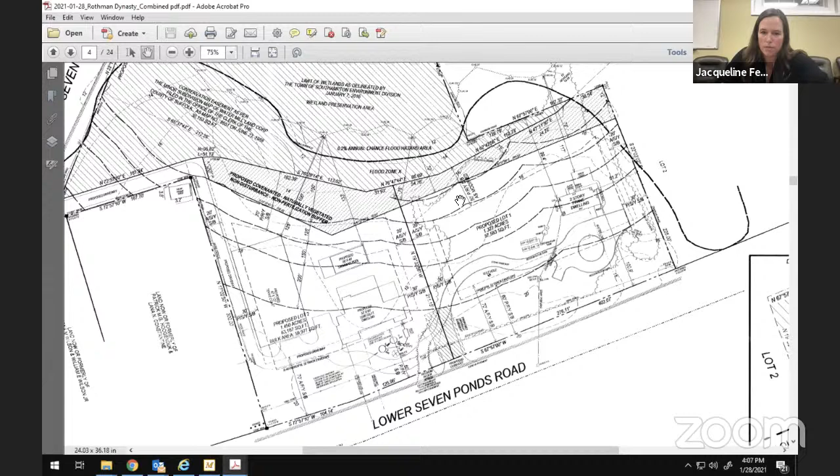No, and quite honestly, with that 50-foot reduction - you see that arrow that Jackie's right next to there? Right next to that arrow is the 100-foot arc, which would be the required setback on an existing developed parcel. So it would not impede upon the required wetland setback. This is the 50 that they're showing, and this is the 100-foot. But on this lot, because it's existing developed, they're required to provide a 75-foot buffer with a 100-foot development setback. Yes, and the development setback is right here.

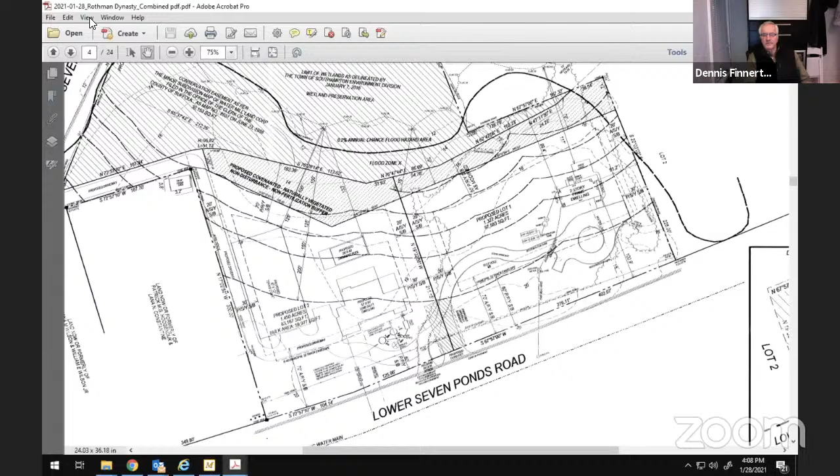Daphne, one of the things I'm looking for is the removal of the remnants of that old fence along Seven Ponds Road. I don't know if your surveyor indicated that on your survey, but if it's not shown on the map, we should get it marked and identified by your surveyor so we can impose a condition to have it removed. Yes, the fence is shown on the map. We are not citing the removal of it, but we have discussed this in the past, and my client is amenable to the removal of that dilapidated fence. Okay, and it would be part of the open space.

Yeah, we can't take the open space with the fence anyway. So Dennis, that is one of the recommendations: the applicant will be required to remove the roadside fence, which is in disrepair, prior to submission of the final application or prior to signature of the final plat.

So if you wanted to come down sooner or later, you can have it come down prior to final application. And then I also asked that all the existing fencing on Lower Seven Ponds Road, which is really the road frontage on the south, be reduced to 4 feet. Jackie, did you write up to the recommendations?

Sure, I was just about to say that. Number 1 is basically your preferred plan, and is the board comfortable with moving forward with the applicant's preferred plan and buffering? I am. Is there a consensus with the rest of the board? I would like a consensus, but it's not necessary. I think I'll defer to Dennis's argument. I always prefer open space rather than a covenanted buffer, but...

I do as well. Jackie, one of my suggestions would be that we could also look at it as a conservation easement. That's a little stronger. It wouldn't be open space, but it would be stronger than a buffer that can possibly be amended through a covenant amendment. Good, I like that. So if you'd like, I'd be comfortable with that.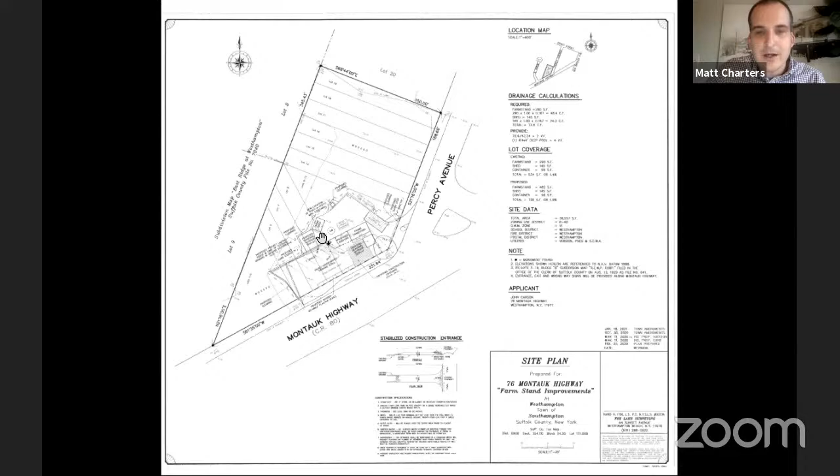This is what the existing stand looks like. Essentially, the addition will be over here. It'll match the existing—these are some rudimentary plans that have been drawn up. Pretty simple asphalt shingles, T1-11 plywood on a concrete slab. And then I will get reading.

Pretty much gave you guys the overview. That's at 76 Montauk Highway in Westhampton. This is across from the hotel where that proposed miniature golf course is on the other side of the highway.

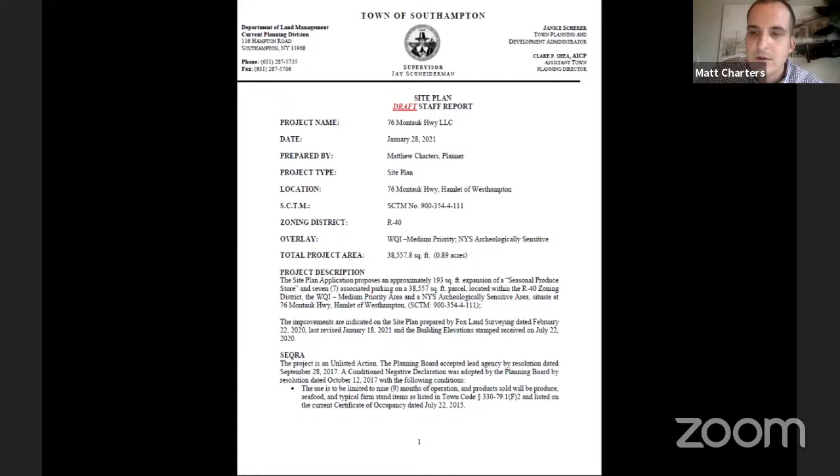It was an unlisted action. The planning board was lead agency and adopted a conditioned negative declaration in 2017. It limited the operation to 9 months and restricted the items that could be sold here. It also prevented the sale of alcohol, tobacco products, firearms, and games of chance. It precluded winterization and required site plan approval with the expansion.

They did get the variance for the expansion in 2017 also. The conditions of the variances mimic the conditioned negative declaration. There was no hearing at the final application stage—this has been heard many times, so the planning board waived that.

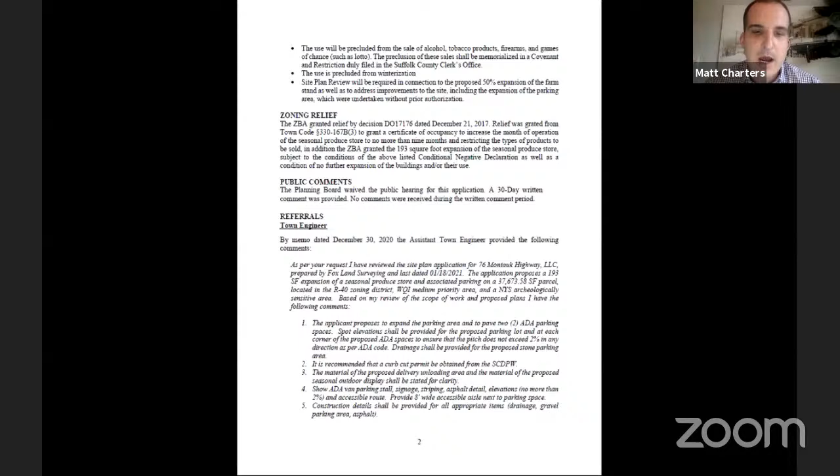Referrals: pretty standard comments from the town engineer. They just need some mapping changes. They need spot elevations for the ADA space at 2% grade. They're recommending a curb cut permit from the Suffolk County Department of Public Works if that's required. They need to show materials, construction details, and the engineering fee of $2,500.

No comment was received from the Suffolk County Department of Public Works. Fire prevention had no requirements, and they advised that they'd address fire safety at the building department. Westhampton Fire District had no comments. The Architectural Review Board reviewed this back on January 5th and had no issues and recommended approval. No comments were received from CAC West.

The Planning Commission found this was a matter for local determination. The Highway Department did note this was on a previous version of the plan that had issues with the drainage. The drainage has been revised, and the town engineer has recommended approval based on the change.

So the site plan, as I said, has 7 spaces. The recommendation I'm going to make is to eliminate one of these spaces, so there's 6 standard and 1 handicap, just so they could provide a van-adjacent width area. And they just need to revise the curb stops so they're at 60 degrees for the angled parking rather than the 90 degrees that's shown.

They also need to provide parking calculations on the plan. As noted, they'll come in on the western side—it's a U, and then go back out on the eastern curb cut. And they'll have to provide signage that shows an entrance and an exit, one way, do not enter, etc.

A condition of approval will be to attain all required permits from the Department of Public Works, the Suffolk County Department of Public Works, if required. The delivery area is via an existing, pretty rudimentary curb cut on Percy Avenue. It's not improved—this is going to be controlled via a chain stop on posts. I'm recommending that the applicant include some signage that denotes that as a delivery area and that there should be no parking.

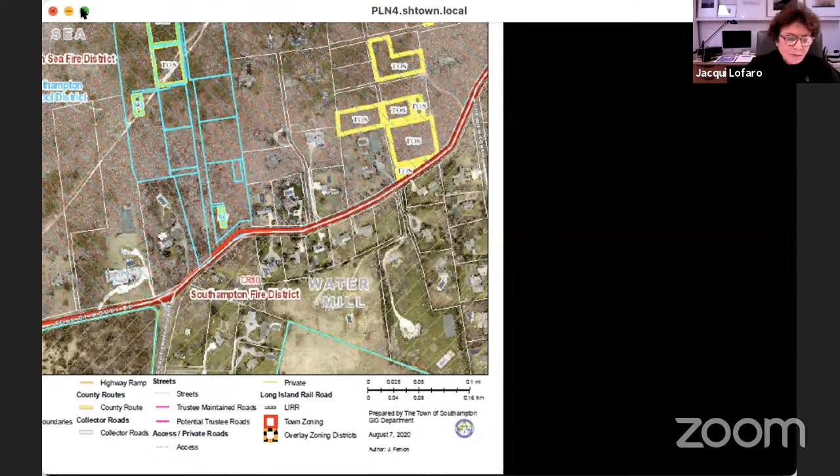This is where the trail was going to go through the property, and now the Trails Advisory Board had asked for it along the edge of Broadway. The Trails Advisory Board met January 5th, and the pink was where they were asking for it.

We had this discussion in December and forwarded the concerns to the Trails Advisory Board, and they did revise their comments. They understood the applicant's concerns, with the understanding that the northern portion of Lot 8 would be dedicated as open space. They weighed in on both issues and found that dedicating the northern portion of Lot 8 to the town is more important than allowing for this additional trail link.

They are going to keep seeking an additional access point to the public road to the west of this area. It's difficult, and they were trying to take the opportunity to get access through here for a neighborhood trail.

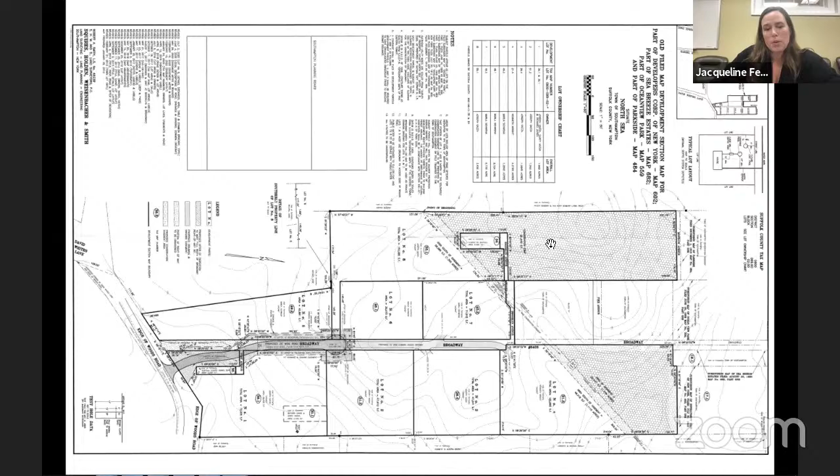So just to remind the board, the northern portion of open space for Lot 8 would be this area. I have amended the resolution, which was in your packet, and I'll read you the Trails Advisory Board comments, and then we can move on.

First and foremost, we'd like to stress the importance of the town obtaining title to part of Lot 8 north of the power lines as permanent open space, as previously stated, which would be a valuable addition to the extensive open space to the north. Presently, a privately owned parcel just to the north blocks public access to Split Rock Road Trail. Town ownership of the northern part of Lot 8 would allow a trail branching from Split Rock Road Trail to the east and north of the power lines without interruption.

As an amendment of our previous memorandum, we agree to withdraw our request for a trail easement along Broadway and not request any trail connection from Edge of Woods Road along Broadway up to the town-owned land. As agreed at the January 5th meeting, this request is contingent on ownership of the portion of Lot 8 north of the power lines being successfully transferred to the Town of Southampton.

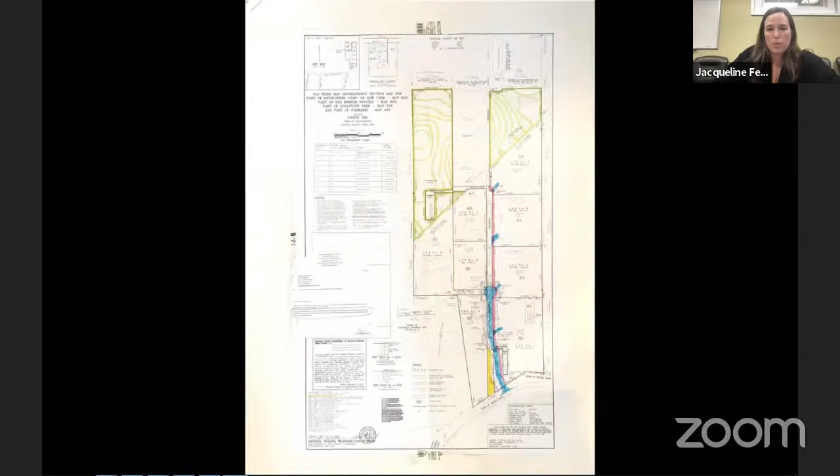And then I amended the resolution to take out some stuff I discussed with the applicant, which includes the 10 and 15-foot wide trail along Broadway. The only thing we want to touch upon is making sure the planning board is comfortable moving forward with a waiver subdivision review, which would essentially have to facilitate this.

I've gone over this with Kathleen and Dave Wilcox, and the Gazas, both Blair and Joe Gaza. Are they in? Sorry, I forgot to ask. But is the planning board comfortable moving forward with a waiver subdivision for this northerly portion? Because this is very important for the trail access. If so, I would draw it up for the February 11th meeting.

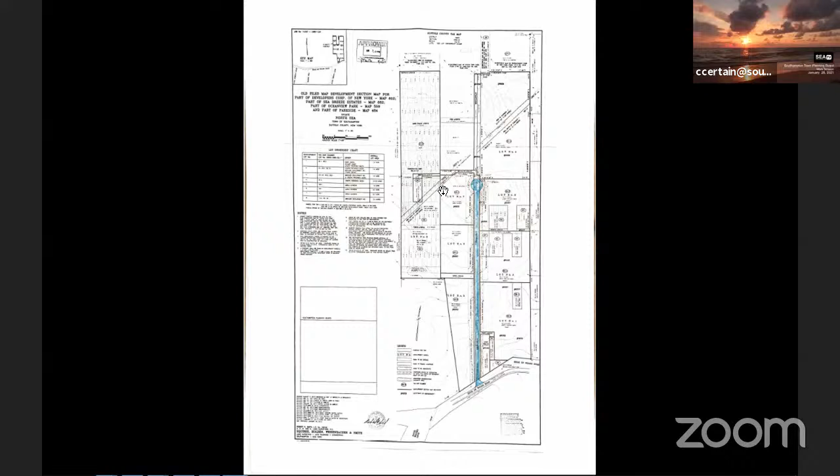Who do you need in? The Gazas, sorry, Blair Gaza. I'm not sure if Marla Schwenk is there too. She has been trying. Okay, well, I think Jackie pretty much spelled it out.

Does anybody on the board have any questions about this? I'm comfortable with it. It's a really good compromise.

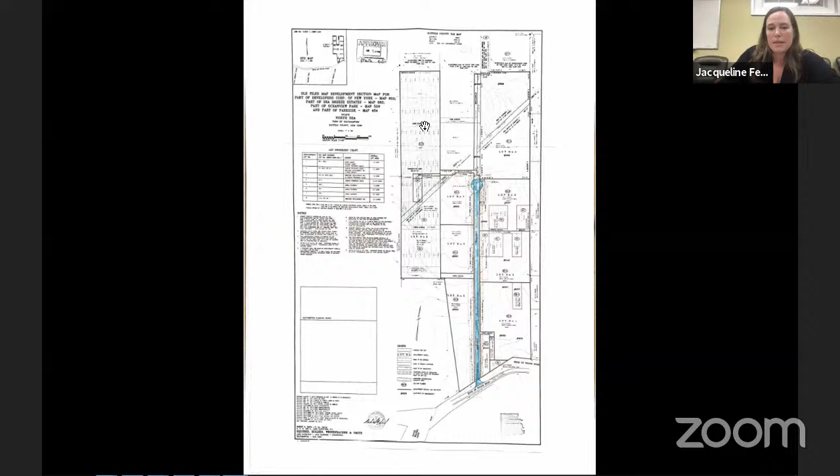Okay, so with that compromise, we can issue the resolution, and I'll bring on the waiver request for this portion at the next February 11th meeting. So what do you want us to do, any action here? Yes, let's please amend the resolution as prepared.

Do I have a motion to approve? Motion by Gloria and second by Zuccarelli. All in favor? Aye. Opposed, abstention? Six in favor, one absent. So the amendment's approved. We've already done it, Blair and Joe. We'll bring on the waiver of the subdivision for the February 11th meeting. The amendment's been approved.

Thank you. The less you say, Joe, the better. Oh, that hurt, Phil. I want to get back in the good graces with the board. It's my favorite board, and we've been having some wrinkles lately, but I'm trying to change things around, iron them out. You're not used to having someone say no to you. No, that's not true.

Okay, we're moving to Jackie. You have a site disturbance application. Yes, I do. Bright East Hills, lot 30.

So this is a site disturbance application. I've been working with them since 2016. Let me just get the information up. Have you seen it? Yes, I have. I've seen it, it looks good. So if the board wants to move on, that's fine. I went there twice, once in the fall and again just recently in January, and they added the plantings that I asked for, and they're ready to go, and then they can get their CC for the property. Okay.